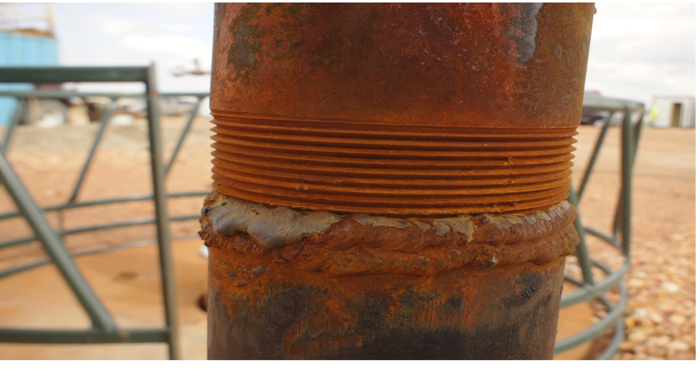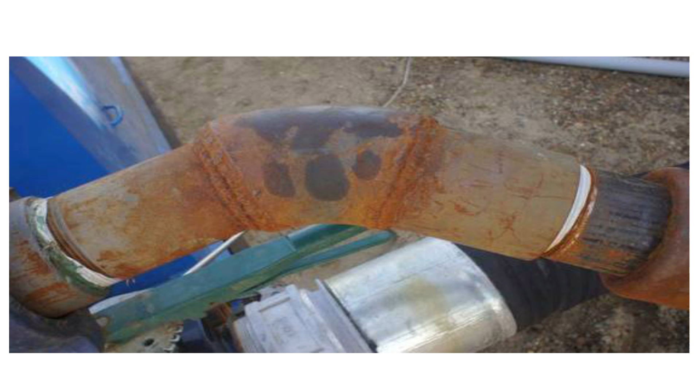You're all welding instructors, now let's see here. What's wrong with that one? This is a 3-inch nipple going into a 4-inch, 45-degree elbow welded onto a 3-inch collar. What a nice job. Anyway, I try to throw a few of these good ones in.

My name is Larry Zirker. I worked 5 years in the oil field as a pipe welder. Used to wear my funky little hat.

You know, people just don't know how to wear these hats right. I gave a few of them away, and the first thing they do is they do this to them. I said no, you wear them poofy like this. And they said why? I said well, because in Wyoming it's always either cold or snowing. Then you can pull it down over your ears and weld on the pipe, and it's poofy so you can protect both ears. So if somebody answers the correct answers today, I got a hat here for you.

It's custom-made, old-school design, reversible and everything. So anyway, retired welding engineer, 30 years with the Department of Energy, welded nuclear fuel rods. That's why I have a radiant face. But worked on airplanes, did a lot of things, lectured, been taught at a couple of universities, and now I just lecture. I've been doing this.

How many here have been to my lecture before? You were last year, you were last year, but you weren't here, and he's been to about 5 of mine I think. And you were last year. I ran into another guy that was at mine last year, or 2 years ago. So were you here? Yeah, I remember you too. Was it any good? Yes. You don't remember? You were the one asleep in the back. Okay, I was in the back.

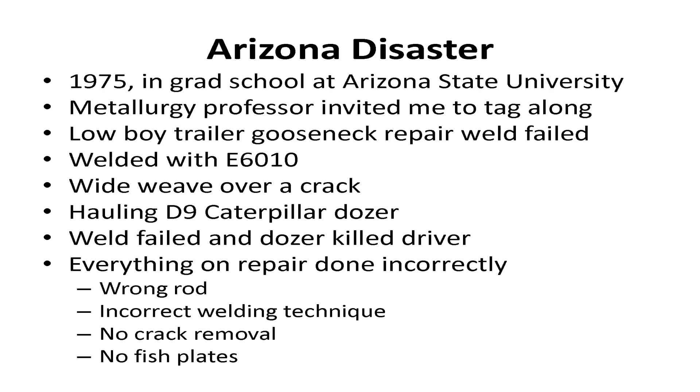And I've always wanted to tell this story because I can see a teacher like you teaching a young man how to weld. He goes on to a shop, and the foreman says, hey Joe, get some 60-10 rod and go out and fix the crack in the lowboy. And what I'm going to do today is try to give you everything I got here, you can have it.

I have it, you can download it from my website, I'll give it to you, but I got slides and backup material that you can give a couple hours of lecture on, and train your people that when you go out and do something like a lowboy that you know has different material, but they just tell you to go out and do it, maybe you can stop somebody from getting hurt. So let's get on with it. The objectives is to help someone avoid accidents, to provide you lesson material.

Have you ever used my stuff in your class from last year? No, but the other guy did. That's all right, that's your problem.

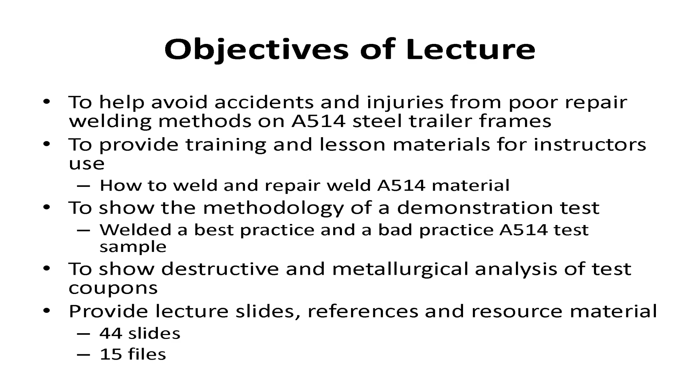No, maybe you might use some of this. He liked some of this stuff. And I'm going to show you how to weld it and repair it.

A514, which is the same as T1. We've all heard of T1, but you may not have heard of 514. I'll show you the methodology of how I did a demonstration test with a best practice and a bad weld, bad practice versus best practice, and show you the metallurgical and destructive analysis.

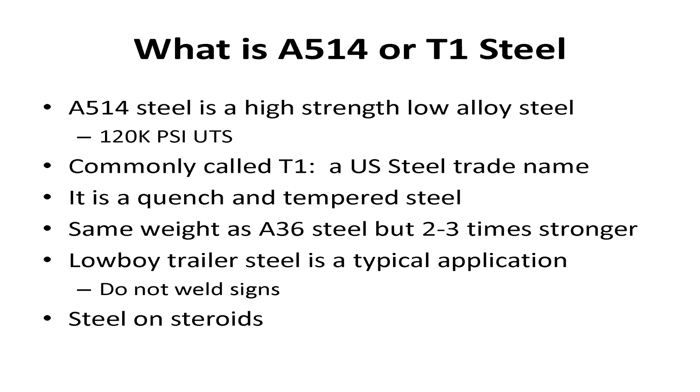Boy, you're going to love this. And then I'll give you all the slides.

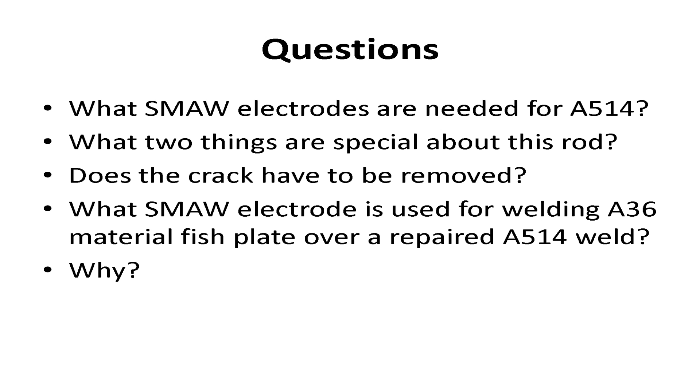Let's see, you want to take a shot at it? Anybody have an idea? You need hydrogen rod, don't you? Yeah, okay, which one do I use? There's probably 10 of them, isn't there? Or 5? 7018? Okay, wrong, that's all right. 8018? No, okay, just as wrong. Just as wrong, but higher tensile strength.

Yes, okay, we've got a lot of slides to go through, so let's do the answers. You've got to match the base metal. 110, wow, this is T1. This is 110, 120,000 tensile strength material.

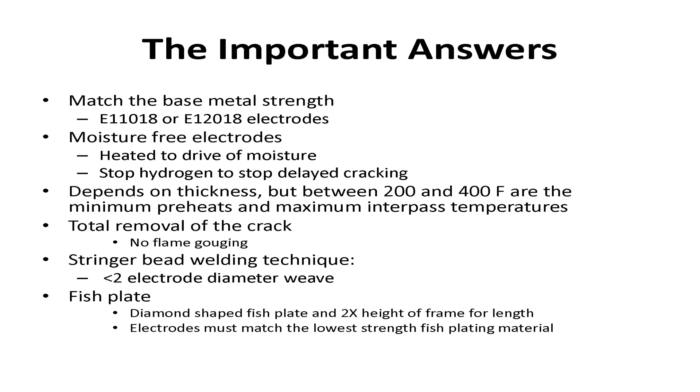On your fish plate, I have a question, because I've done trailer repair and I put them in a triangle type method. Is that correct? That's exactly right, that's correct.

What kind of welding rod do you use to weld the A36 fish plate on this high tensile steel with? What did I use, what should we use? Now you're welding this onto a high tensile strength frame. What kind of rod should you use? Wrong. If you put the high tensile rod onto this A36, it'll break out the weld.

You use 7018. You match the welding rod to the lowest tensile strength of the steel. I set you up, but I wanted to do that. So let's go back, so that would be a 1020 plate, like A36, 1020. So what kind of SMAW rod would you use? 7018. Why? Because you match the strength of the metal.

What is T1? It's a high strength, low alloy steel, 120 KSI. If it's thicker, it'll be 110. It's commonly called T1, a quench and tempered steel.

Quench and... how would you know that that's what the base material is? Call the manufacturer before you try to repair it. How do you identify it? Sometimes you can see it written on there. But the prime thing is, there'll be a big sign that says 'do not weld on this frame, dummy.' Well, then you know it's T1, because it wasn't that it was built by unskilled welders, but they didn't want an unknowledgeable person doing it.

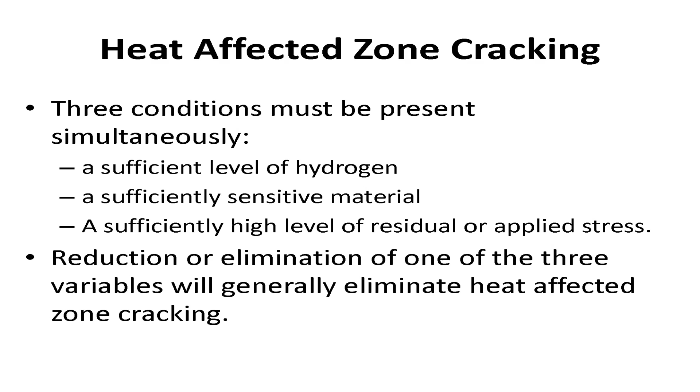Three things must happen to have underbead or hydrogen cracking. You got to have hydrogen in it. You got to have a sensitive material. You got to have martensite. You can't get this with A36 material.

The stuff you practice welding on with your students, you could probably weld it, throw it in a snowbank, and it would probably still bend just fine.

But this stuff is like, consider, I had two girlfriends once. One said, I'll make you cookies. I said okay, and she made me sugar cookies - egg, flour, cooked with a little bit of sugar on it. My other one, my wife, she said I'll make you cookies, and she made it with oatmeal, raisins, chocolate chips, coconut, and pecans. Well, that's the kind - they're both cookies.

A36, 514, both steels, but this one here's got steroids and a lot of goodies in it. And you eliminate any one of these three, and you don't have hydrogen cracking, generally. That's why we do what? Bake the electrodes. We bake the electrodes. We get rid of the hydrogen.

Very good, you guys are good. All right, here's something. If you read the book on welding this material, it'll say - I copied this right out of a book - half-inch material, preheated to 300, interpass temperature 300, and you can't have a heat input of more than 47 kilojoules per inch. Here's the formula for it: volts times amps times seconds over 1,000, times the travel speed. Well, when I did that, it came up to 60 kilojoules.

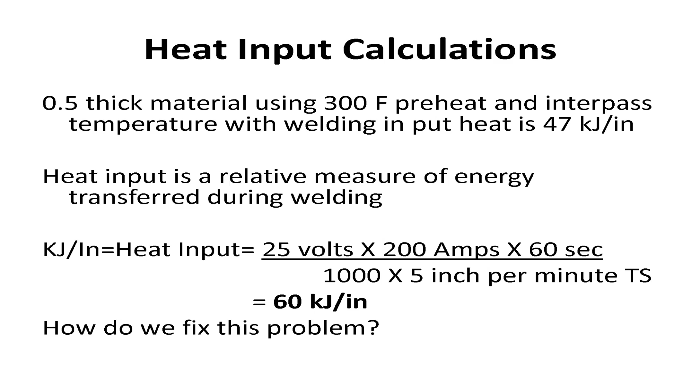How do I fix that problem? How do I weld it now? My kilojoules are way too high, I got too much heat input. I do what with my travel speed? You increase it. Will that drop my kilojoules? Yeah, good question, good answer.

Also, what else can you do? Smaller diameter electrode, turn your amps down, and that would get you right down to the 47. This is something you can do with your classes - you give them this, and they should know how to multiply something simple like that. Even those, my two friends there are from Utah, their guys should be able to do that. Do they teach algebra in Utah? I think so, they do. You can shorten your arc too. Okay, see, you taught me something.

More details. Okay, now this material is quench and tempered. That means when it's made in a factory, and they pour it out, and you get those sparks, and they make these big long ingots, and they're all bright red, and when they get to this, they run it down through, and they get it to the right temperature, they squirt water on it. And so if I take 4140 steel, what they make gun barrels out of, they get them in the untempered, unhardened condition, and they make the gun barrel and make the riflings, and then they temper them so they're real hard. Well, you couldn't machine them if they were hard, right?

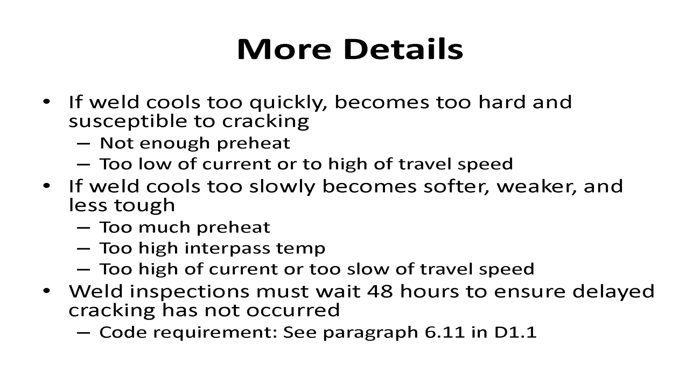You have too much. And also the code says that you have to wait 48 hours. Why? Make sure that all the hydrogen's out, so there's no cracking. That's exactly right. That's right in the code book.

Okay, it's very sensitive - it's kind of like getting married to a redhead. If everything's right, everything's cool, but you screw up a little bit, it's hell to pay. They blow off, this material.

No, it's a minimum preheat, a maximum interpass temperature. Most of your students will never know that until they get out - that's something you can tell them. It's a balance between the time between passes, the base metal thickness, and preheat.

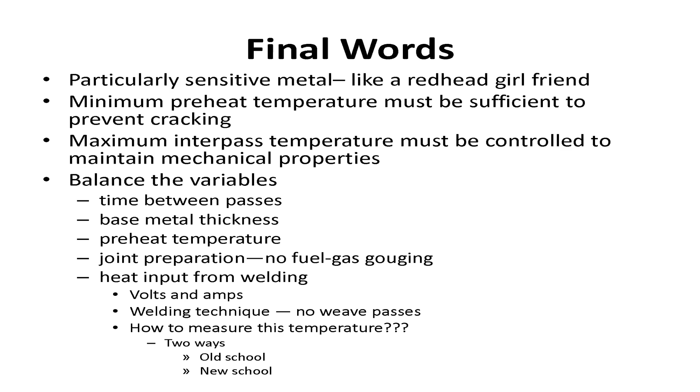Tempil stick - if you spit on it, it bounces 3 times before it falls off, that's 300 degrees. No, I'm just kidding you. 4 times, 400 degrees, right? Yeah.

All right, where do you find information? If you get a piece of metal, 514 - have you ever heard of 514 before? Well, how would you know how to weld 514 if you didn't know how to weld it? Where would you go? Look it up somewhere. Where?

Code is the very best place to go. It will tell you the welding rod, and it always tells you the mechanicals and the chemicals. Now if you can find the chemicals, what's another really good way to give you a feel for this material? Your students are blessed because they have a bright guy here. If you quickly do a calculation of carbon equivalent - what do you think the carbon equivalent on this material is?

I think it's 0.68. What does that tell you instantly? Mr. Army man, Mr. Marine, what does that tell you? 0.68 - that should be a red flag saying wait a minute. What did you say, 0.68? Yeah, 0.68. When do you start to preheat?

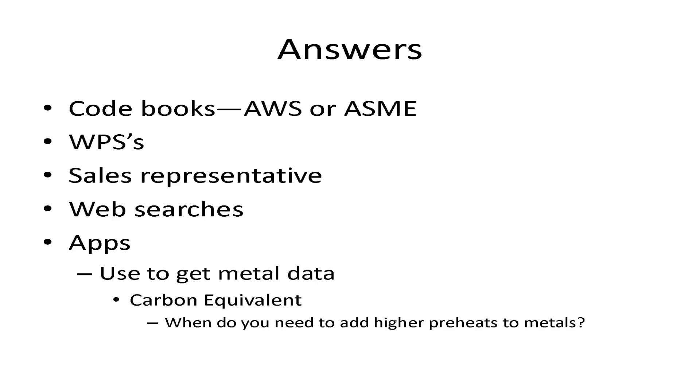Yeah, okay, this is what I did - what am I looking for, time? Over half an hour, oh well, we can fill that. Didn't mean to babble so much. All right, what I did is I thought, okay, to do this right, I need to do a practice test.

So I went out and bought some of this steel - oh my gosh, that was pricey, it cost me $130. And then I bought some welding rod - ooh, this is really expensive. And then having the samples cut, that was $30 a coupon. It was water jet, the best way to get them - it didn't come out with a plasma torch or a laser, it was water jet.

So I welded one up correctly - right heat input, welding technique, correct practice, right rod. The other one I welded up like a young kid that didn't know any better. He was sent out to weld it - he'd probably take a 60-10 rod to fill up the cracks and some 70-18 to weld it. That's exactly what I did.

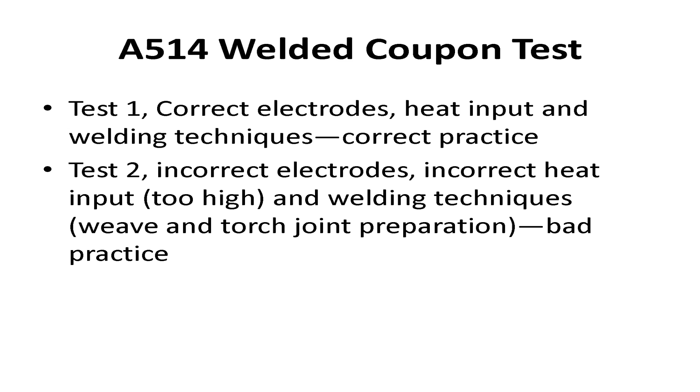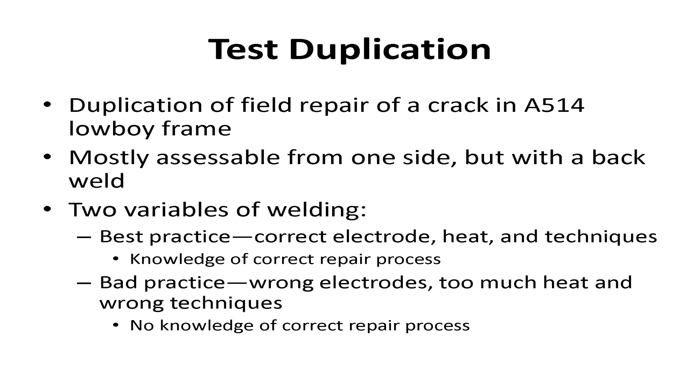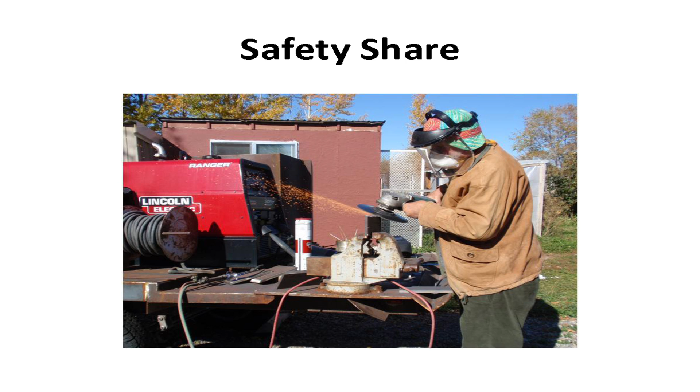Ear protection - I got ear protection, it's right behind my collar, you can see it's my little... gloves. Right on. Do you like peanut butter or do you want other? Sorry, I didn't throw that very good. Sure, you want to trade? Trade, John. Oh well, thank you.

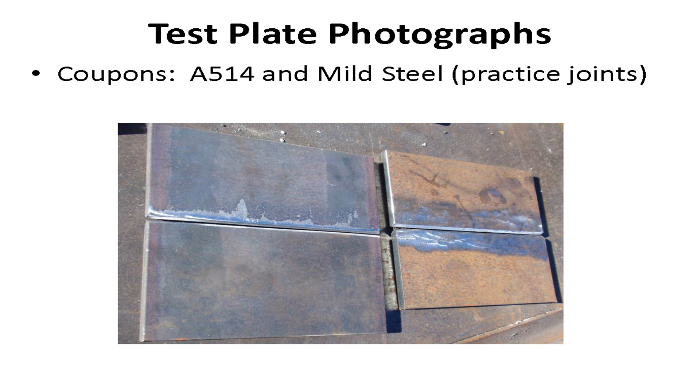Good enough, okay, that's right - I didn't have gloves on, I was sanding down my disc. Okay, there's my plates - I did an A36 plate so I could practice weld. I don't weld enough, I practiced on that one. Then I'd run it on the A36, and then I'd run it on my good one.

This is the bevel I used, and then I flame cut the bad one. We're putting so much heat into it that the quench and tempered material, it's like taking your pocket knife and putting it in a campfire and leaving it for an hour. Because it's tempered, and you put that heat into it, you're going to mess it up. You're going to anneal it. Well, that's what happens when you flame cut this material.

Plasma cut's okay. Flame cut's bad. So the other one I flame cut the joint. Here I tacked it up.

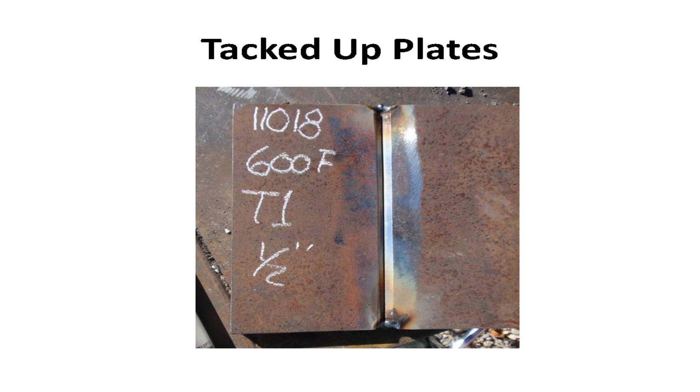Here, oh look, there's my Tempilstik. Where'd I put it? Oh, always right here. There's my Tempilstik, and see it smoking? I got the right temperature.

I preheated the good one and welded at 300 F, and the bad practice at 600 F. Once I got going it was hard, I had to wait 20 minutes to cool that other one down. I kept wanting to squirt it with water, and I just didn't think I should do that.

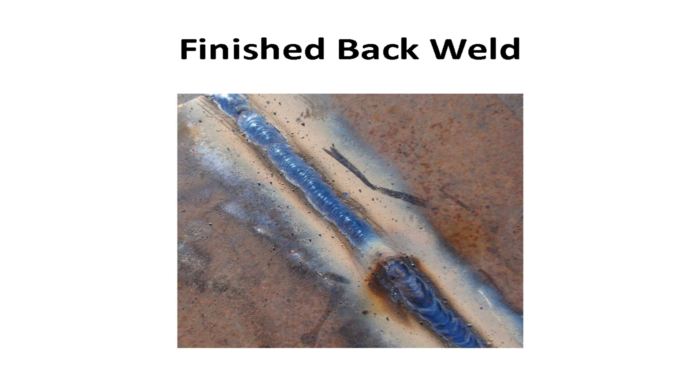There's the back weld. There's the first fill pass on the back side, second fill pass. Then I cut out these coupons out of each one of them with the water jet, and we'll show you those.

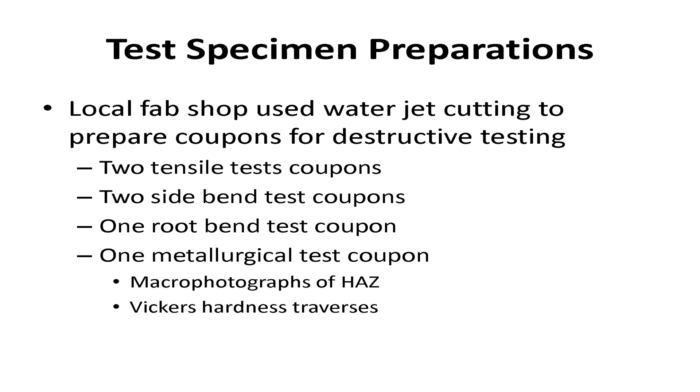There's the side bend one, best practice. Didn't even bend this hard. Look at it, snapped it.

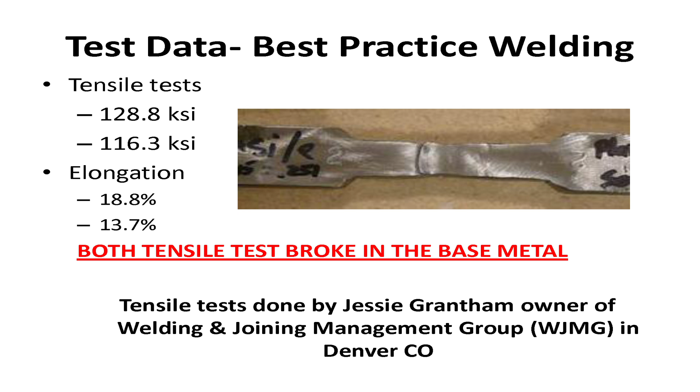The best practice, look at the tensile strength. 128K. Isn't that sweet? 116. And they both broke outside of the fusion.

Elongation. I had this Welding and Joining Management Group out of Denver do my testing. They're just such a good old guy. We went to school together.

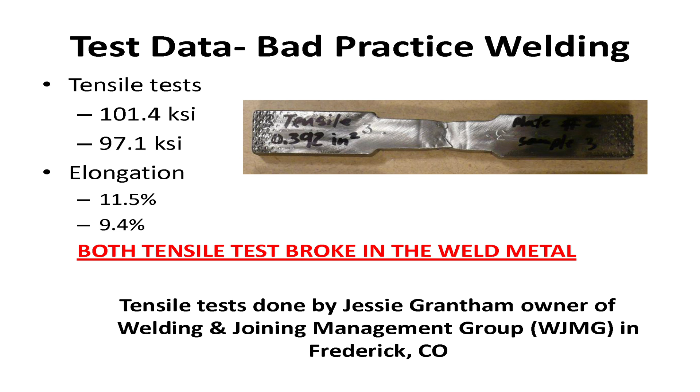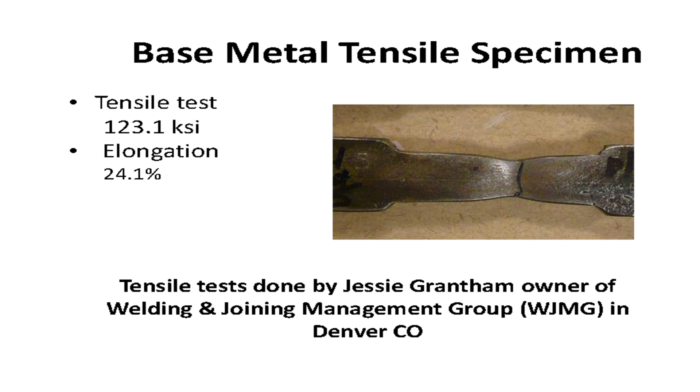There's the base metal, just a raw base metal, no weld, base metal tensile specimen. Heck, we had a higher tensile than the one we welded. Did a little elongation. Hardness profile.

Oh, this was really interesting. I used to work for the Idaho National Laboratory. That's the nuclear arm of the Department of Energy.

Remember, they did a grant for me. I asked them, nobody in town can do it, and they said, well, we'll do it for you. And I had to get somebody to give me 4 hours of billable hours.

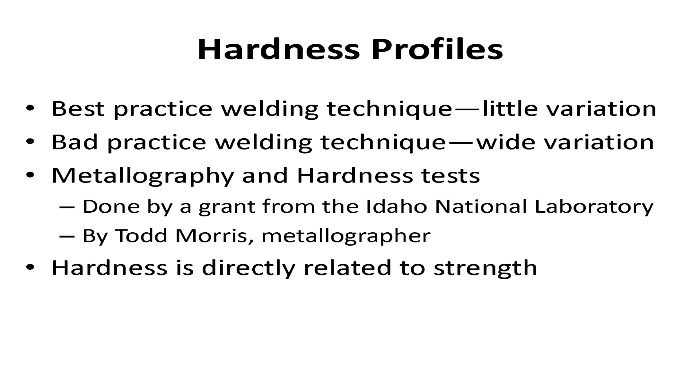Hardness is directly related to strength. It's a direct relation to strength. The good weld, this is really good here.

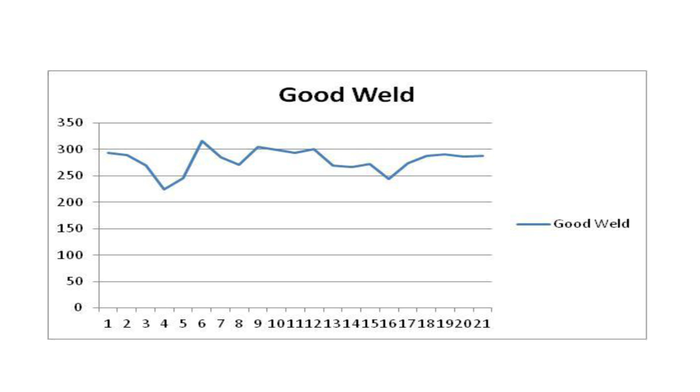The weld shaped like this, the hardness traverse was right through the center, 1/4 inch down from the top. Notice this is the base metal hardnesses, and they were a millimeter apart. There was about 18 of them, I think. So this was the center of the weld, right here. This is the base metal.

The base metal got a little dip for the heat affected zone, and then the weld metal was the same hardness as the base metal. That's what got quenched just fast enough to cool, to harden a little bit, but it wasn't too hot to anneal the material.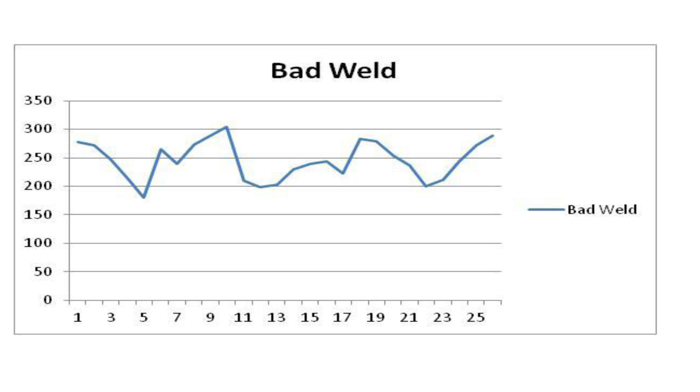Now, we'll show you why this happened here in a minute. Put them, superimpose them. Heat affected zone is right here.

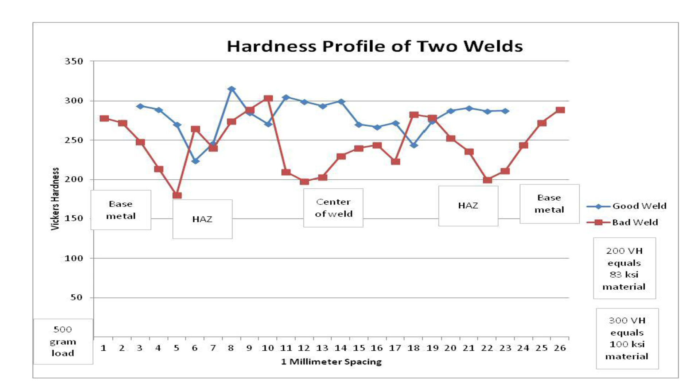I brought my sample. You guys will like this. You can look at it. If you'd like to pass it around, just don't touch it with your fingers, or my buddy will dislocate your shoulder over there.

And then there's something really neat that nobody will notice, but you look at it for a second. All right, there it is, right? It was taken, the hardness test was taken right through the center, just like that. Now notice, see the heat affected zone here? Nice even heat affected zone.

See the heat affected zone here? It's about twice the width of that. Well, I had twice the heat input. Big weld. And you can see how big and gobby this weld was.

It put a 60-10 root in it and had to grind it down, and big weave passes.

Now, I ground off the weld and got it ready to be cut into the coupons, and I noticed some porosity. So what I did is I did a repair weld. Can you see the repair weld right there? And there's another one right there, a different color. When you hold it in your hand, you can see it better.

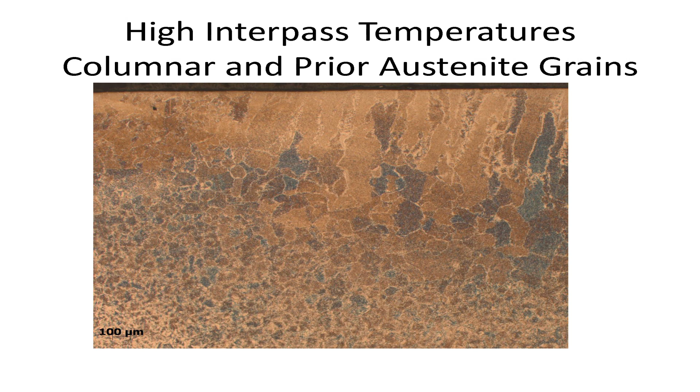Now, this is the base metal down here. This is what the microstructure of the base metal looks like. What's this called right here? That's weld metal. That's weld metal. A weld, these columnar grains.

If you were to look at them closely, they should be martensite. But this is a 50X. If you were to see it at 200X, it would probably show up as martensite. However, this is something interesting. When the weld metal melts onto the base metal, which is right here, there's your fusion line right there, it always grabs onto an existing grain and it says, oh, I like to grow in that grain — preferential grain growth.

And that's why these will always be attached. If you look real careful, they're always attached. For some reason, this one attached down here. And they attach onto a non-melted grain and they grow. And they usually grow to the heat — they always curve to the heat source. This is right close to the top and you don't see it.

Now, how hot, if I were to come out here an inch or so, how hot would that be? Or 3 inches? How hot would the base metal be 6 inches away from that weld? Give me a guess. Yeah, 100, whatever, or room temperature if it was — it's a good practice or bad. Yeah, that's your preheat temperature.

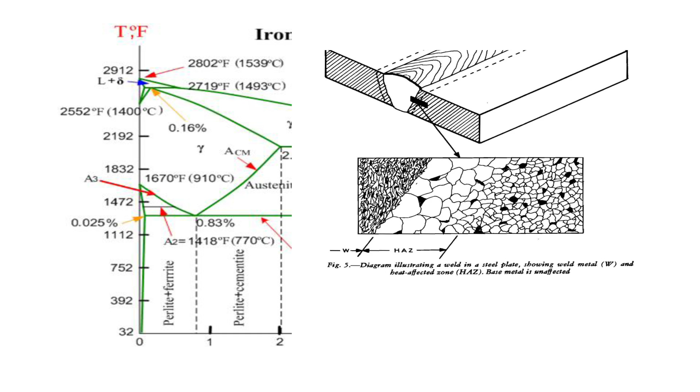Here we go. Everything you guys weld, probably 99% of your materials, is going to be perlite and ferrite. It's going to look just like this - a little perlite, carbon's out here. What's the percentage of carbon in those things? For a hat, who can tell me what percentage of carbon is in those perlites? 83, that's right. You want a hat? You can have that.

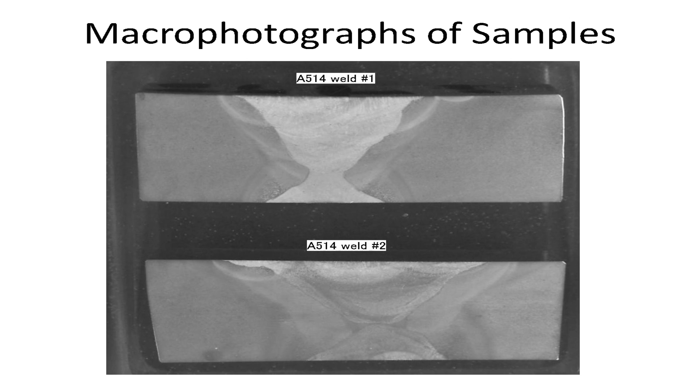All right, this is what we're going to do. Everything you practice on in welding, pipe coupons and plate coupons, it's all going to be here, because it's always going to be about 0.2 to 0.3% carbon. It's going to be right over about here. This is the iron carbon phase diagram.

Well, steel is not just an iron carbon phase - it's got manganese in it and a bunch of other stuff, but this is as close as we can come to it. So when you heat it up, and when it gets up to about 1,330, right about there, it changes into this epsilon thing, which is another symbol for gamma, which means austenite. When it gets into that, the carbon that's in the grain boundaries and in these little - it's like chocolate chips.

If you were to heat up chocolate chip ice cream on a stove, it'd end up to be chocolate milk, wouldn't it? Those chocolate chips would dissolve. And steel, when you heat it up, it turns to chocolate milk, but when you cool it slowly, it goes back to chocolate chip ice cream.

But when you heat it up, the carbon in here - this is 0.83% carbon - these little nodules, and there's a lot of carbon in the grain boundaries, they will start to dissolve and they'll be out in this matrix here. I don't know why they have those there, they shouldn't be there, but the carbon dissolves.

And what's the biggest hardening element, chemical element, the biggest contributor to hardness? Diamond? No. What chemical element or material contributes the most to hardness of anything? Carbon. Carbon does, okay? High carbon steel - drill bits are high carbon steel.